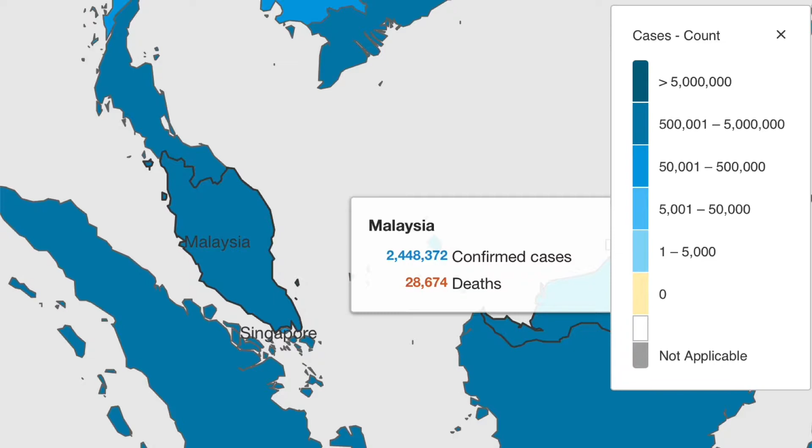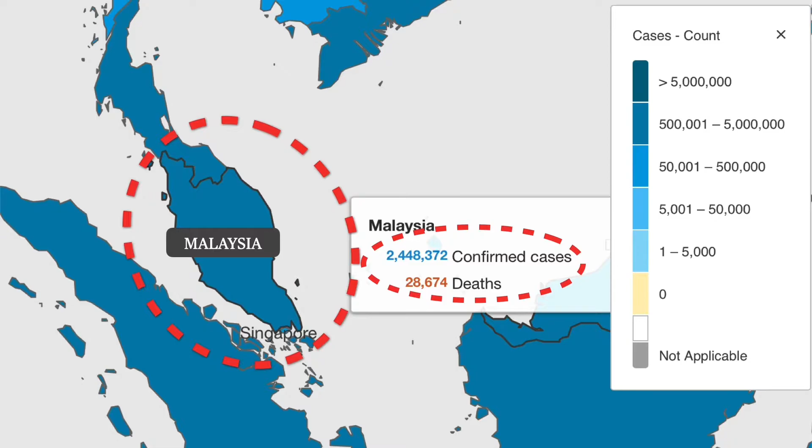The latest global update on the COVID-19 cases is over 200 million infections with about 4 million deaths. While for Malaysia's latest update, over 2 million cumulative infection cases with above 28,000 deaths. This data was retrieved from the WHO website on 28 October 2021. Where did coronavirus originate? COVID-19 was first speculated to have originated from bats to animals sold for food at the market in Wuhan, China. Recent studies have confirmed that bats constitute a reservoir for COVID-19 virus.

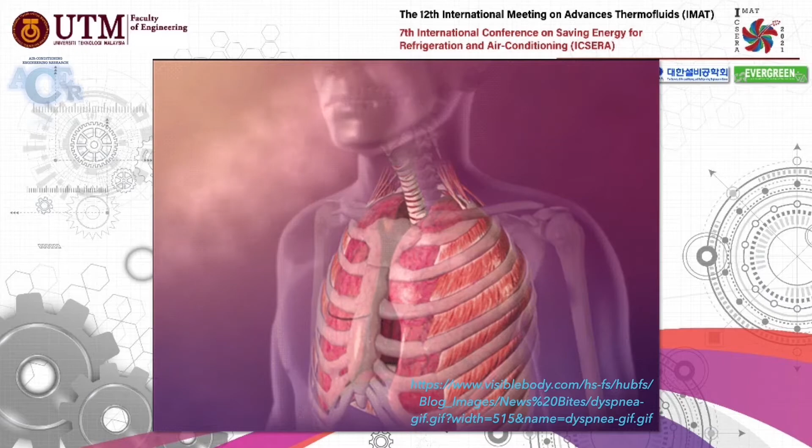Why is it dangerous to us? The virus spreads on moisture droplets through the air or surfaces, eventually finding its way inside our bodies, typically through the eyes, nose, and mouth. The virus is transmitted through the respiratory tract when people breathe in droplets and tiny airborne particles released from infected people when breathing, talking, coughing, and sneezing. The probability of inhaling these droplets is highest when people are adjacent to the infected one. Infected people are more likely to transmit COVID-19 when they are physically close.

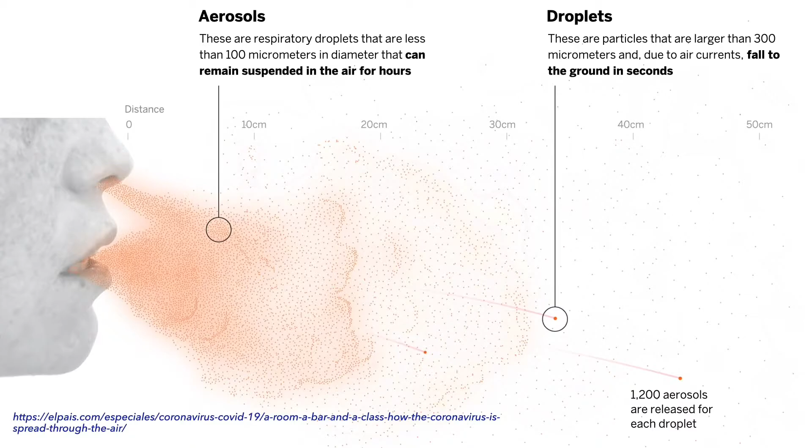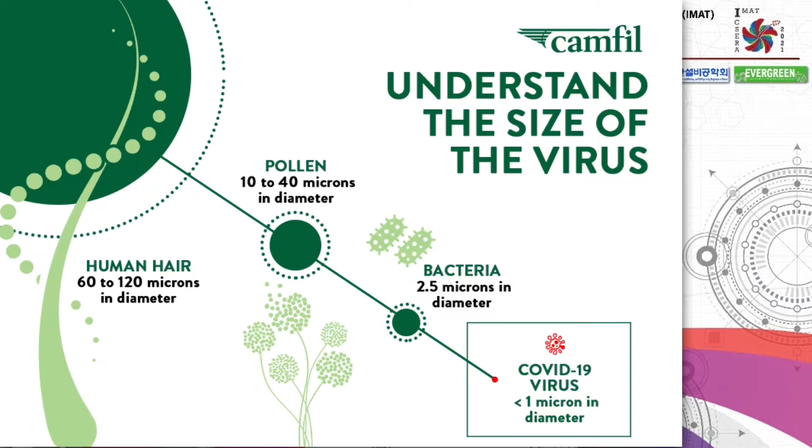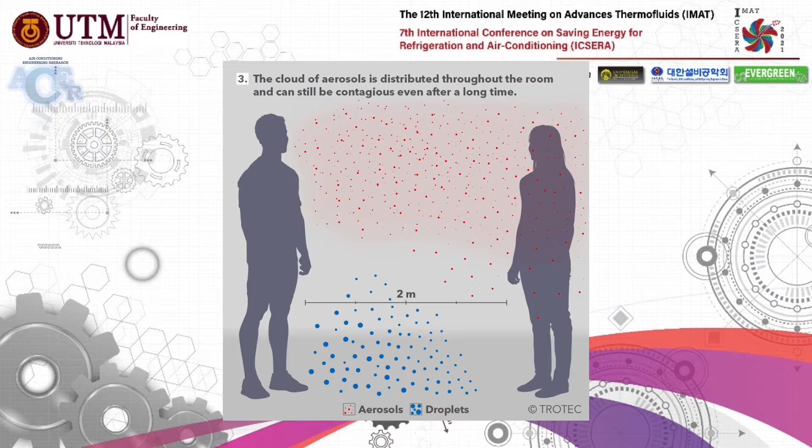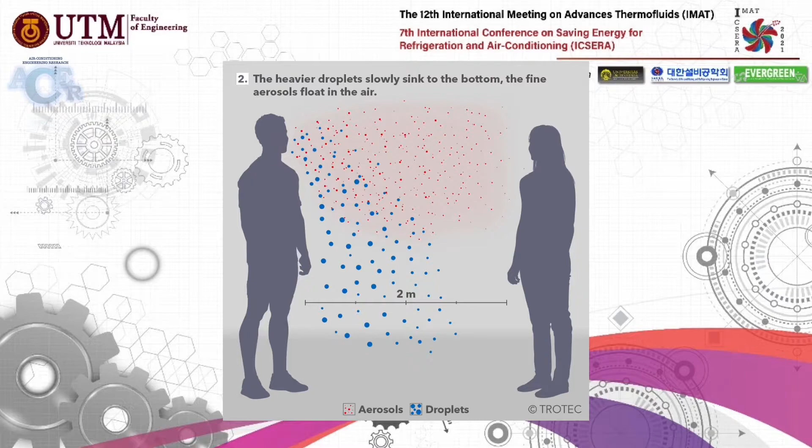On the other hand, the tiny droplets, known as aerosol, less than 5 micrometers in diameter, travel exceeding 2 meters and stay in the air for 3 hours to affect the secondary proprietor without contact with the first host. How dangerous is the virus to us? The coronavirus invades the cells in the back of the infected person's nose, reproducing and spreading downward and infecting healthy cells along the way. COVID-19 harms the lungs of people affected by the disease. These lung injuries can lead to acute respiratory distress syndrome or ARDS, in which most people with COVID-19 die.

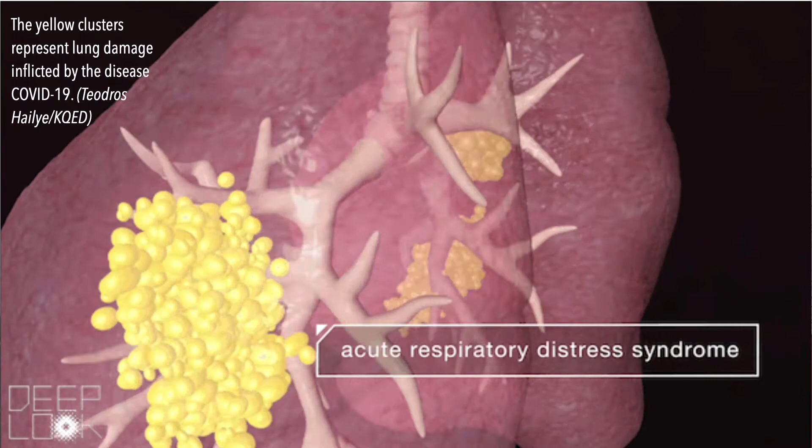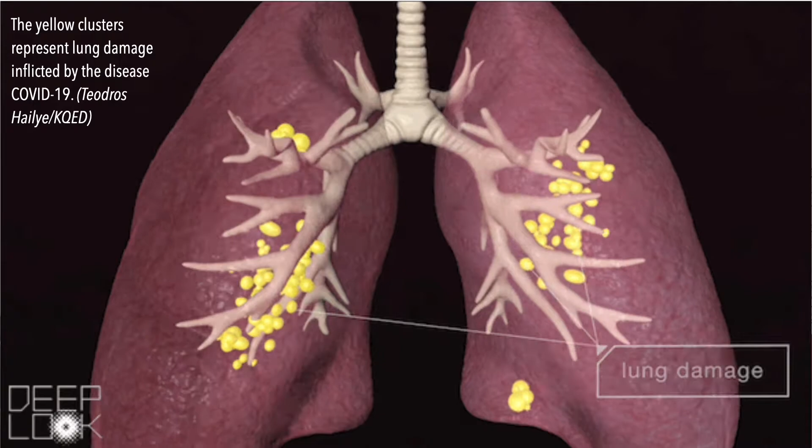Acute respiratory distress syndrome is a severe lung problem. Fluid builds up in the lungs, causing breathing failure and low oxygen levels in the blood. ARDS is life-threatening because it keeps organs like the brain and kidneys from getting the oxygen they need to work. It can also put a strain on the heart. Most people with ARDS will be treated in an intensive care unit. Based on the animation, the yellow clusters represent lung damage caused by the disease COVID-19.

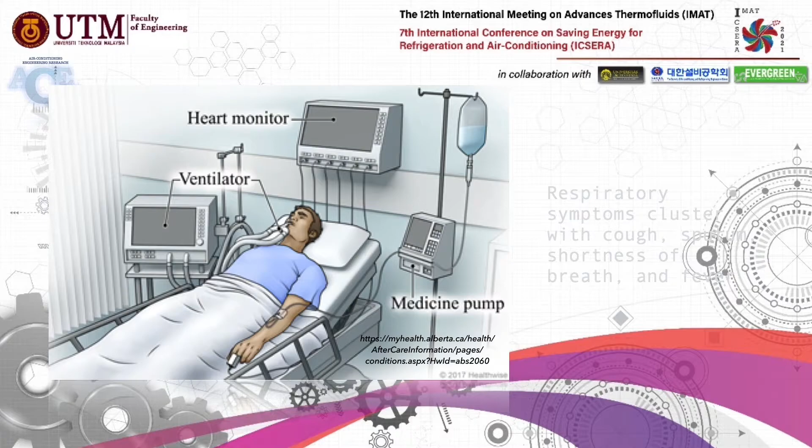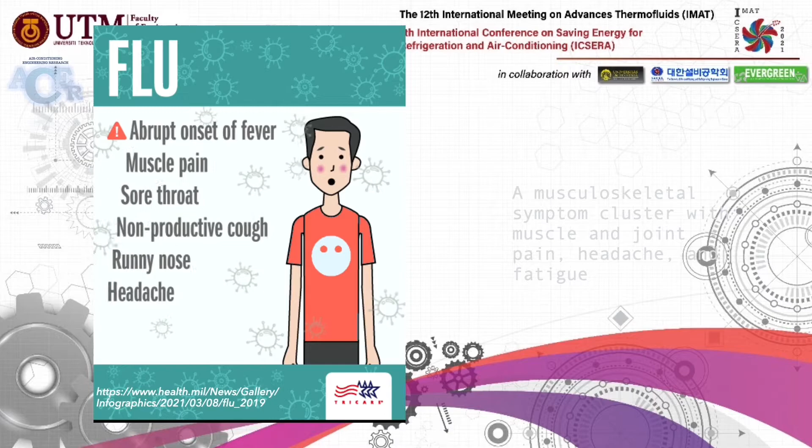Three common clusters of symptoms have been recognized. The first one is the respiratory symptoms cluster with cough, sputum, shortness of breath, and fever. The second is a musculoskeletal cluster with muscle and joint pain, headache, and fatigue. And the last is digestive symptoms with abdominal pain, vomiting, and diarrhea.

Can we contain the COVID-19 pandemic? The answer is yes, we can contain the COVID-19 pandemic through the following measures. Covering faces with a proper face mask, social distancing, stay at home, isolation, taking proper vaccinations, and wash our hands.

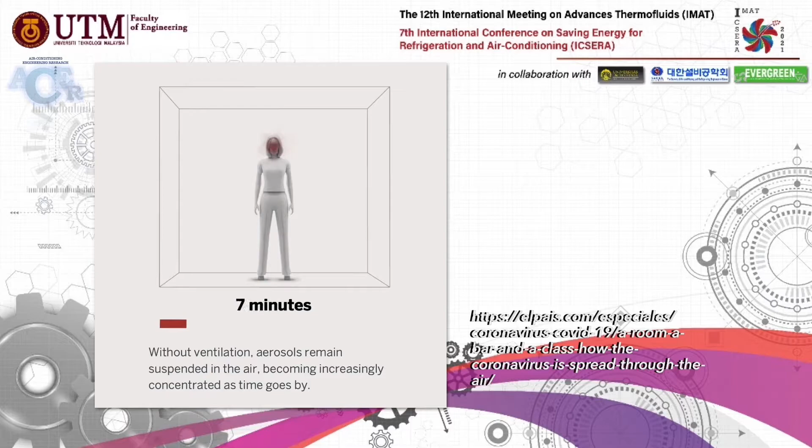Droplets or aerosols are an essential source of contagion in confined spaces. Based on the simulation displayed, without ventilation, aerosols remain suspended in the air, growing in concentration as time goes by. Recent studies reported that the majority of the COVID-19 infections occurred indoors. Many researchers agree that a proper ventilation system is essential to combat the COVID-19 virus inside indoor spaces. The American Society of Heating, Refrigerating, and Air Conditioning Engineers, or ASHRAE, has introduced and adopted a new direction to alleviate the airborne transmission inside buildings. The regulation focuses on increasing the air exchange rate, supplying adequate outdoor fresh air, filtration, and extending ventilation duration.

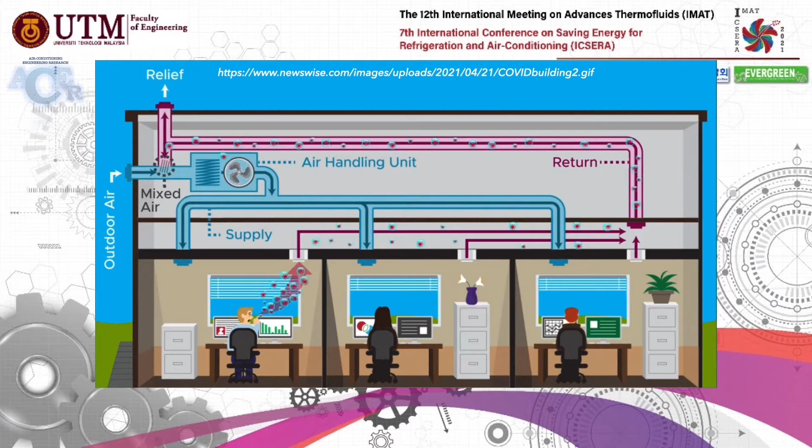The ventilation system's performance is determined through airflow characteristics and the air exchange rate. What is an air exchange rate? An air exchange rate is the number of times per hour that fresh air from outside enters a room and is mixed and exchanged with stale air from inside. The air exchange rate tells us how fast we can clear the room from any airborne contaminants. Why is this important? Because if the air change rate is too high, a room loses air spent on cooling. If the rate is too low, the room air becomes stale and stagnant, leading to a build-up of toxins, viruses, and pathogens.

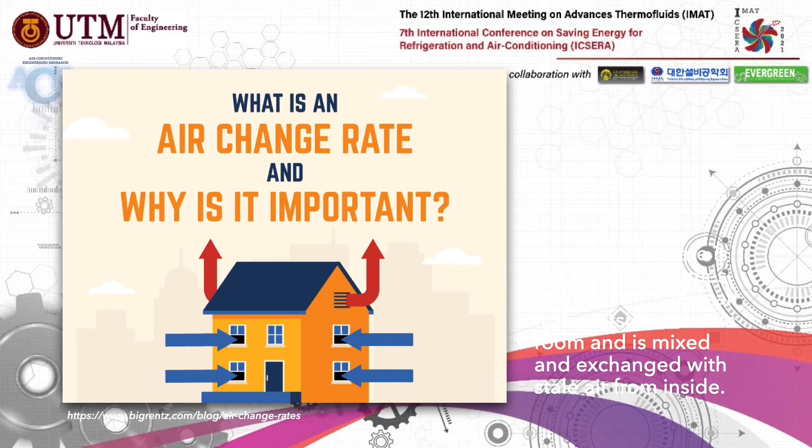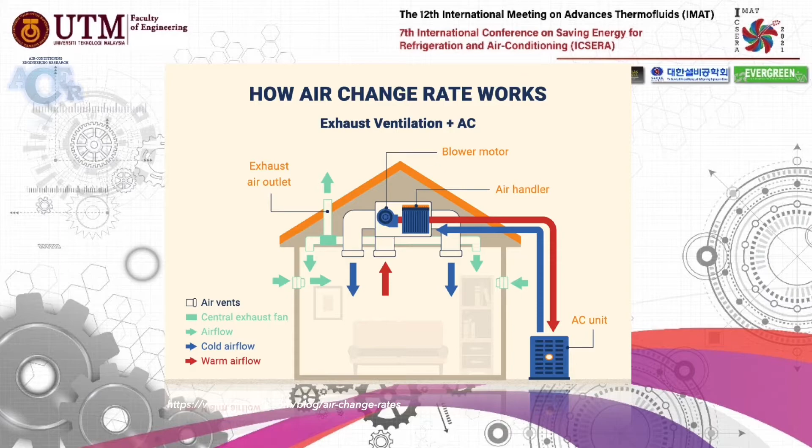Based on this illustration, two types of airflow enter the house, indicated with green arrows: fresh air from outside and cold air from the air conditioning specified air vents. The purpose of this airflow is to exchange air with the warm air inside. The warm air, the red arrow, is expelled from the house through the designated outlet air vent. This process repeats, and the number of cycles is based on the number of occupants, building location, and type, such as homes, hotels, offices, stores, schools, sports facilities, or restaurants.

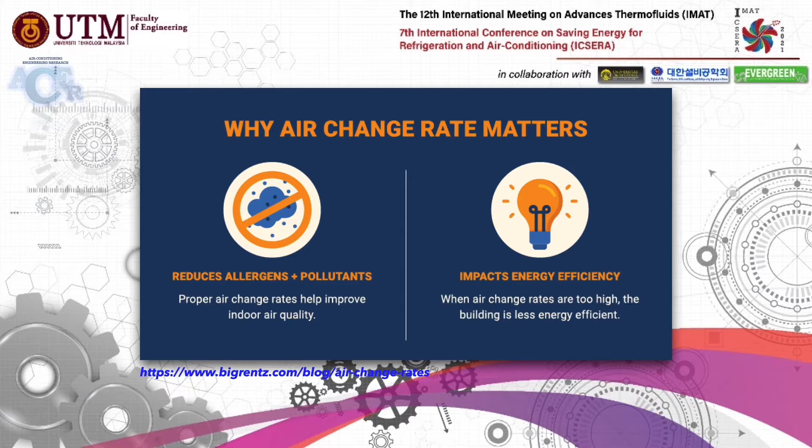Understanding the air exchange rate of a building is essential for health. It is also essential to identify when fixing heating, ventilating, air conditioning equipment, or insulation materials, or to design a new building.

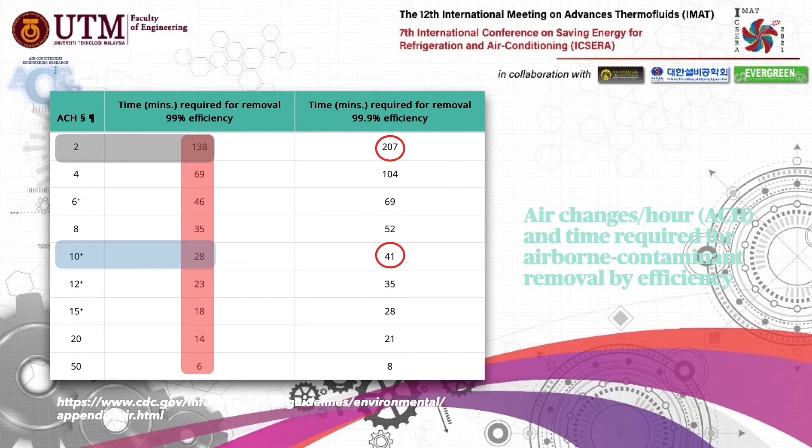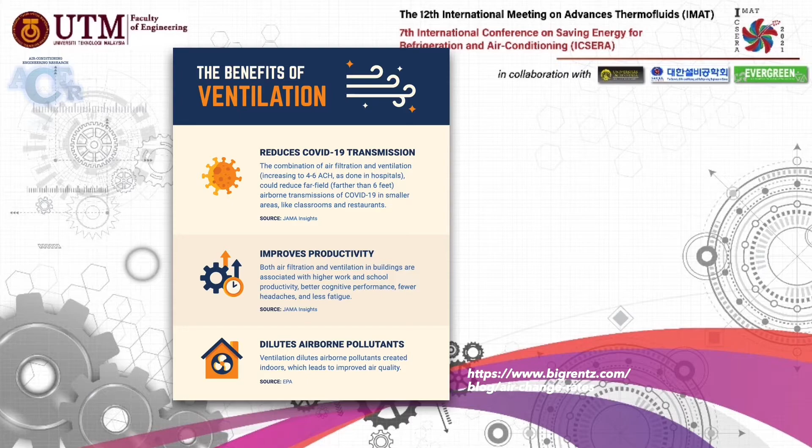The higher rate can be accomplished by opening doors and windows and using filtration systems. However, the trade-off from increasing the air exchange rate decreases energy efficiency. Air exchange rate is vital in buildings like schools, offices, and hospitals. When inside air is mixed with outside air at the proper frequency, air quality increases and the chances for epidemics or other health risks decrease.

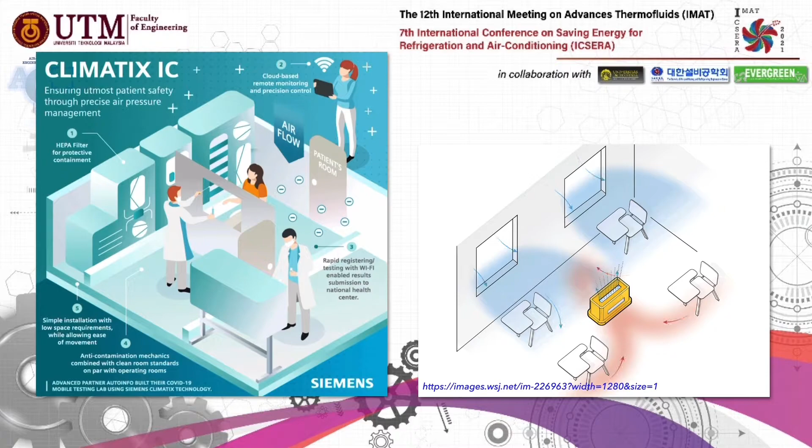Not only that, the excellent air exchange rate, utilizing both passive ventilation such as doors and windows and active ventilation such as heating, ventilating, and air conditioning systems, helps ensure that everyone inside is as comfortable as possible. There are various methods used to analyze the airflow characteristics and ventilation performance inside a building.

The commonly used methods are empirical models, analytical models, zonal models, multi-zone models, small-scale experimental models, full-scale experimental models, and computational fluid dynamics models. However, the most attractive method is computational fluid dynamics modeling, since it is the most reliable to assist in the design and evaluation of the performance of a ventilation system regarding thermal comfort and air quality.

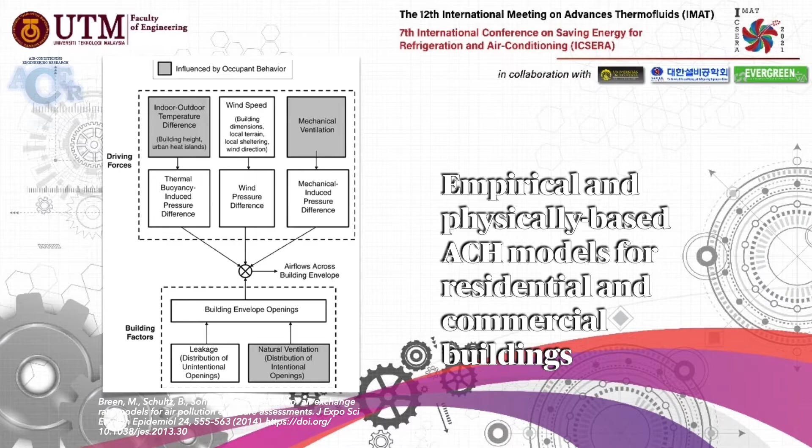The study uses a building dynamic simulation tool, IDA Indoor Climate and Energy. This tool is used to predict thermal comfort, indoor air quality, and energy needs in buildings. It has two types of model. The first one is the climate model, and the second one is the energy model.

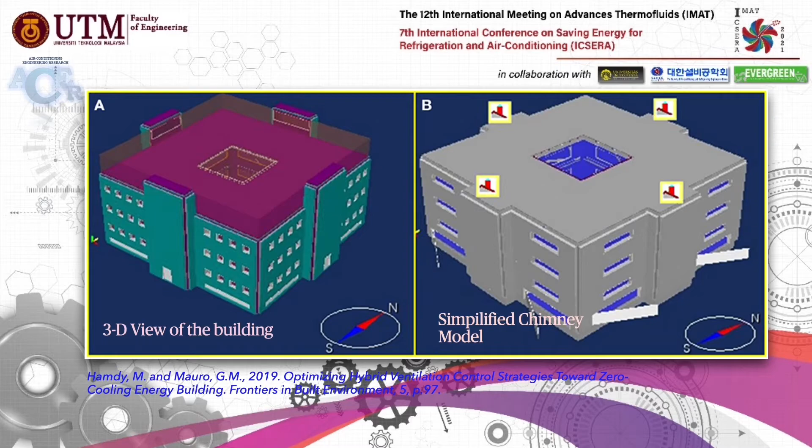As mentioned earlier, computational fluid dynamics models are the most attractive method since they are the most reliable to support designing and evaluating a ventilation system's performance regarding thermal comfort and air quality. For instance, as shown, the Fluid Dynamics of Disease Transmission Laboratory at MIT conducted a study to visualize potential real-life situations of how COVID can spread among students with just one positive COVID case in the room.

The study has demonstrated that significant ventilation for schools can help curb transmission. An open door and window in the classroom can increase airflow, which helps flush out old air from the room and let fresh air flow in. However, the seating arrangement is also essential. Based on this illustration, be cautious not to put kids near where the air is flowing in or where it is flowing out to avoid creating a potential transmission hot zone.

In another situation, the findings indicate that schools must not use plastic partitions since they will cause more harm. Initially, the plastic partitions were intended to block larger droplets. However, based on the simulation, it can be seen that the adverse effect causes good airflow to be hindered and allows any trailing viral particles to hang around longer.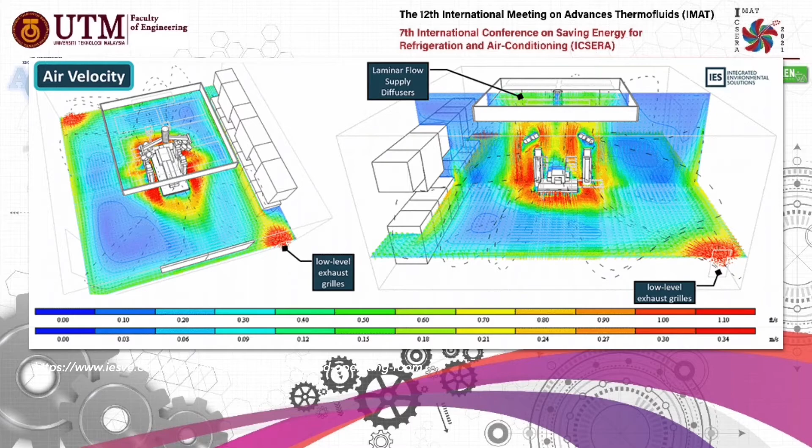CFD simulation is an essential tool for designing ventilation systems in critical healthcare facilities. In this model, the researcher is tracing particulates within the room and showing air velocity gradients. The model was developed through specific information based on a typical operating room, ASHRAE Standard 170, Ventilation of Health Care Facilities.

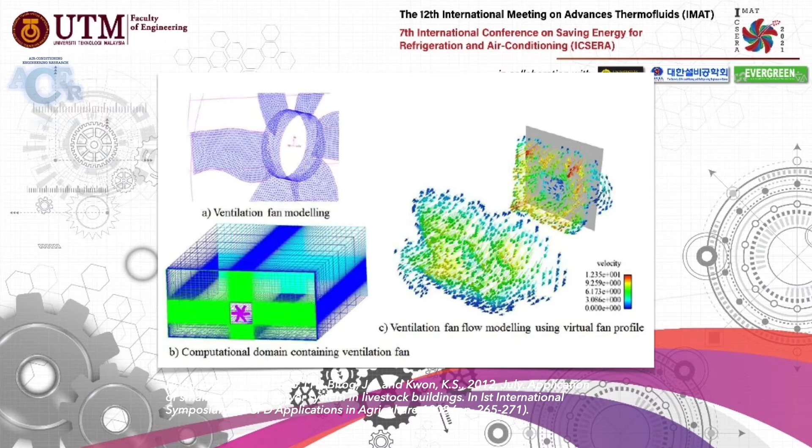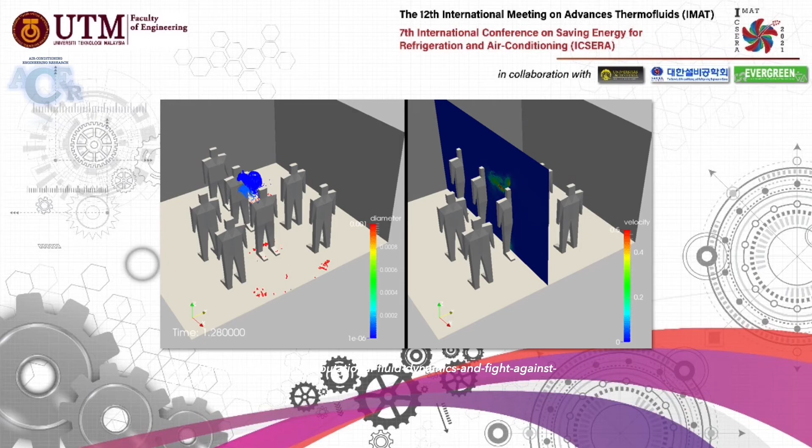Another study shows CFD simulations of ventilation fan flow, including ventilation fan modeling and virtual fan profile, as shown. These virus flow simulations predict the distribution of viruses in enclosed and open environments, such as hospitals and supermarkets. These predictions will be more relevant in highly populated spaces such as airports or crowded hospitals.

As for the conclusion, a fundamental approach to lowering the concentrations of indoor air pollutants or contaminants, including any viruses in the air, is to increase ventilation, the amount of outdoor air coming indoors. Proper ventilation also reduces surface contamination by removing some virus particles before they fall out of the air and land on the surfaces. As a result, lowering the concentration of COVID-19 virus using ventilation and filtration can play a role in controlling the transmission of the virus that causes COVID-19 disease.

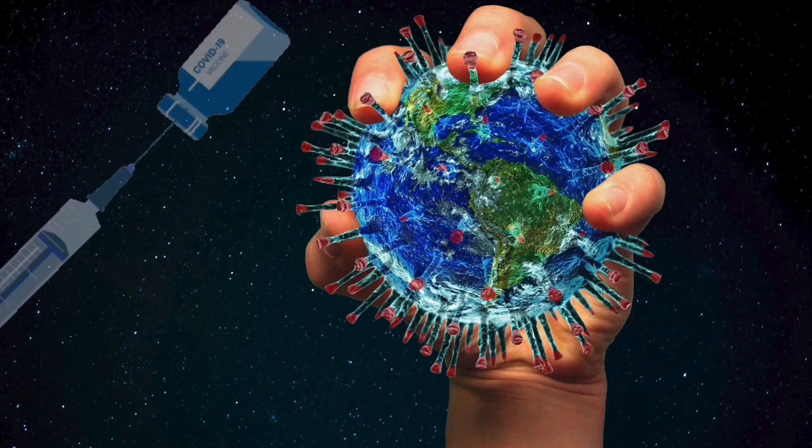Controlling the environmental conditions of a confined space may offer a feasible solution to increasing the inactivation rate of the COVID-19 virus.